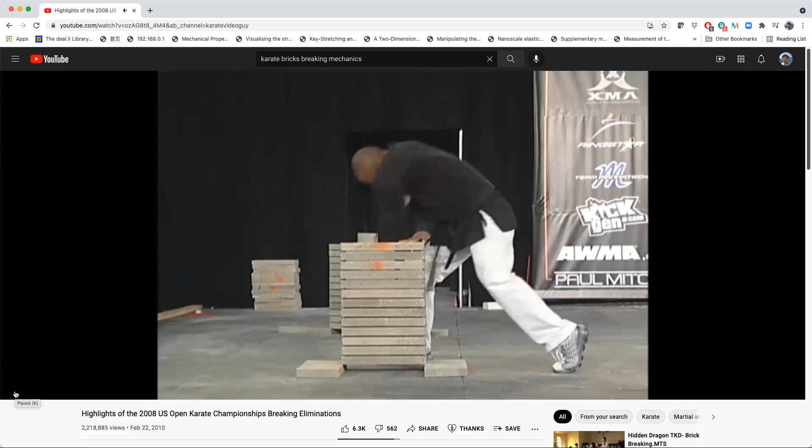All right, enough breaking for us. Let me just try to close it out. I need to find my cursor again. Not so smart on this computer thing here. All right, where's my cursor?

Okay, all right, so what have we learned from this? Well, we're not so smart. We like breaking bricks to show we have power.

Is that the only thing you've seen? Oh come on, don't be cynical, right? There's got to be something nice there, right?

So there are two motions, right, to break the bricks. One is the guy is using the forearm, right? It's pretty lean bone on it, meaning it's not a flat bone, not something flat like a palm or something like that, right? And the second is that he's hitting it pretty fast, isn't it? Very fast impact. But one thing you haven't noticed is that all those bricks he broke are supported, isn't it?

Simply supported, isn't it? Matter of fact, being like supported. All right, so what kind of stresses happen when it hits the brick? Naturally the bending stresses, but that's not it. The idea of the breaking is actually coming from the shear motion.

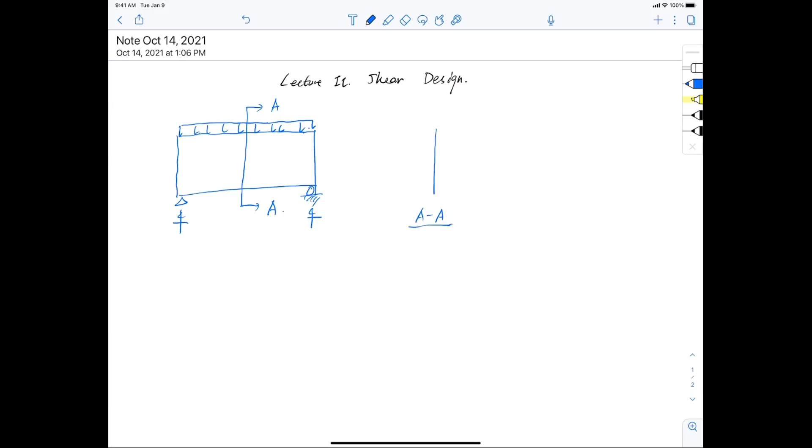So in the positive beam, I look at my section and I start to draw my stress distribution, assuming an elastic material, meaning no cracking in the concrete and nothing, right? My strain will follow a linear distribution like so. And we know that the top is in compression, the bottom will be in tension, right? So compression and tension.

All right, so this is from mechanics of materials. If I take a look at the section AA again for shear stress, all right, what is the shear stress equation here? Tau, shear stress distributed in the middle section, equal to what? And if I say I have a shear force exerted on this section to be V, it should be VQ over IB. All right, VQ over IB.

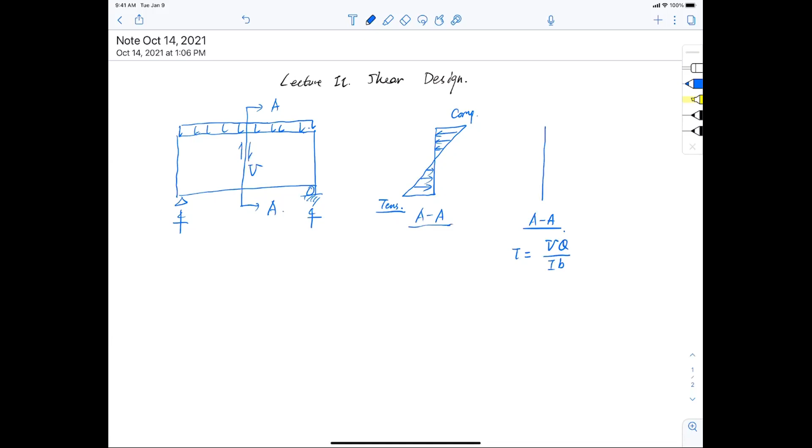Okay, and now if I do this, right, so I have a distributed shear stress like this. Okay, distributed shear stress like this. And the maximum shear stress is going to be in the middle span right here. And that's the maximum shear stress. So in terms of bending, the maximum stress should be either on top in compression or on the bottom in tension. All right, that's how the stress distribution looks like.

So here now, if you want to take a look at the stress, combine them together, I need to have normal stress, and that is bending moment M multiplied by distance from anywhere to the neutral axis, so this is Y, divided by I, the moment of inertia. And I have shear stress. Then I will have a combination of stress states in this beam here.

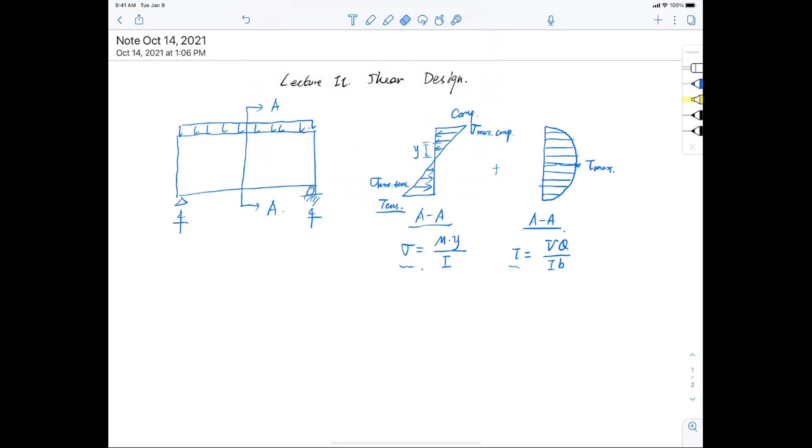So if I play along and start to look at elements along this line here, let me clear this out here. And I started seeing that maybe at the bottom I have one element, and I call it element 3. And in the middle I have another element called element 2. All right. And then on top, I have another element called element 1. All three elements are having different stress states.

All right. Now, what we have learned so far is that, assuming we don't care about shear, we have been focusing on the tensile or compressive stress in the section in terms of flexure bending, right? So if we only focus on this, right, when we bend it, the failure starts from which element? 3, 2, 1. Which one?

3, right? And why is that? Because it has the tensile stress, and concrete is bad for what? It's good for compression, bad for what? Tension, right? So without any reinforcement, concrete will bust first at the bottom. So element 3 will be gone, is that right? However, in the video, you have seen not necessarily element 3 will fail first. Is that right? All of a sudden, out of nowhere, the beam just gone and separated in two pieces. Is that right? And sometimes it actually failed in the middle.

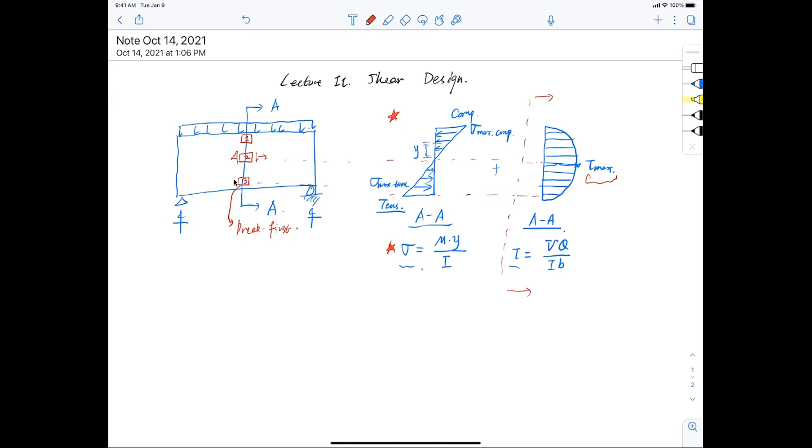Okay. And that is because we never consider the effect of shear stresses so far. So now we have to account for it. You have learned from mechanics of materials, right? In mechanics of materials, we say that if I take this element out, right? My cursor, I really don't like this. Anyway, so I look at an element, let me use a different color here, element 3, for example, right? Okay, and now I magnify my element 3, and I know that it is under tensile stress, isn't it? So I know that here I have sigma max tension.

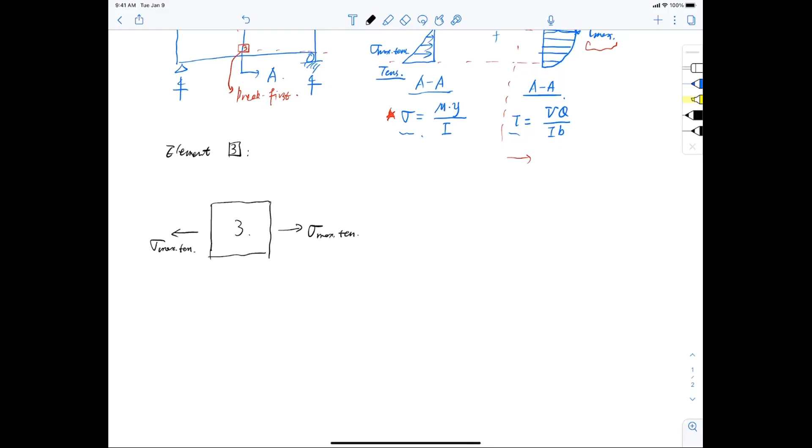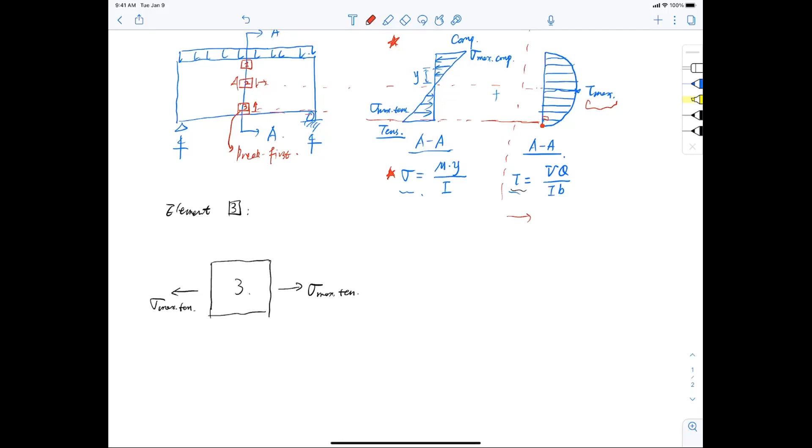Okay. Do I have any shear stress at element 3? Well, let's take a look, right? Element 3 is at the bottom of the element, so I trace it all the way back to the shear diagram, and notice that there's no shear stress in element 3. Very small amount, right? It's on the edge of the diagram and it's almost 0. As I move up a little bit, I will see a very tiny amount of shear stress. All right, so let's draw it. So I say that I have some shear maybe, but a very small amount, so I can ignore it. So that means when I have this element failed, I need to examine the principal stresses.

Do we understand the principal stress definition? Anything? Forgot? Galaxy far, far away, long, long ago. What is principal stress? Anyone?

Principal stresses are the stresses that are only in what? Tension and compression, right? After you rotate the coordinates to a principal plane, you only have the tensile and compressive stresses, right? So in this case, since I don't have any shear stress, I only have the tensile stress. And that naturally is my sigma 1, which is the highest of the principal stresses. And meaning that my failure is going to be a straight crack like that, isn't it? Okay, that's what it is for element 3.

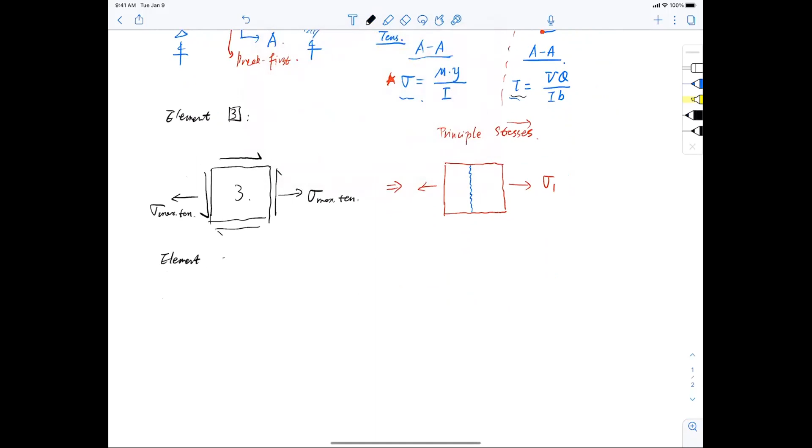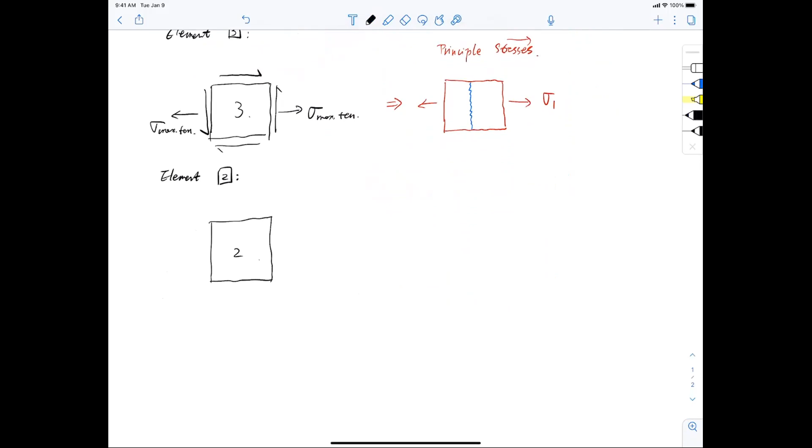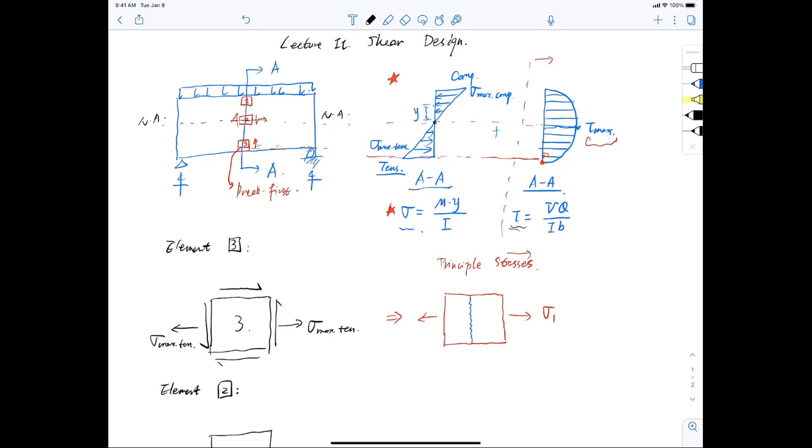But element 2 is different. So when I have element 2, I take a look at the element, and there's no tensile stress or compressive stress. Why is that? Because element 2 is sitting right on the neutral axis. And on the neutral axis, there's no strain. It's the pivoting point, no strain, okay? So that means I only have the maximum shear stress. So for element 2, I only have a shear stress tau max, and I don't have any normal stresses.

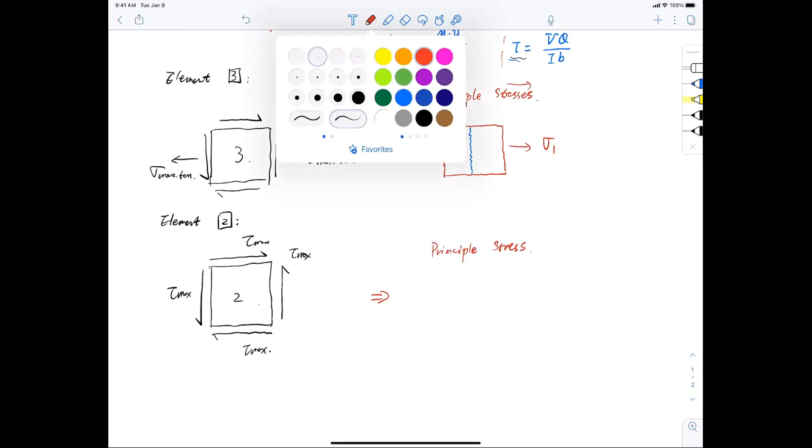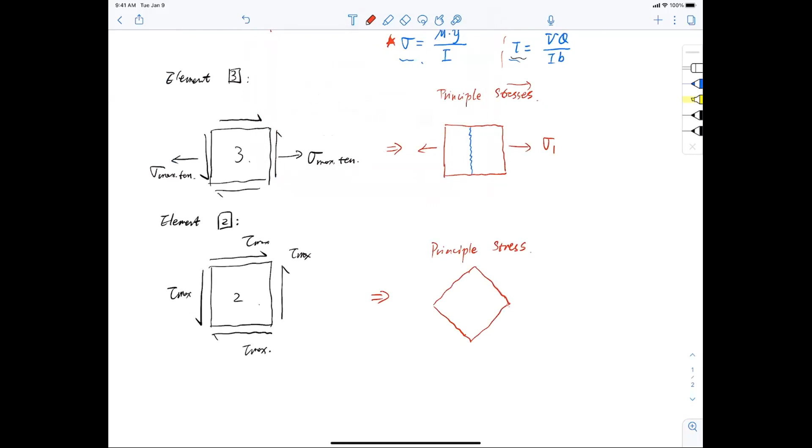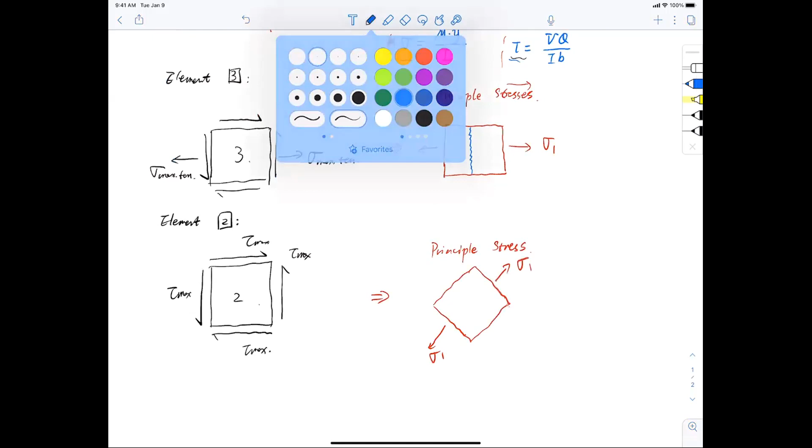Okay, so for a pure shear stress state, when I convert that into principal stresses, meaning tension and compression only, we know that I need to rotate that by a 45-degree angle. And then my principal stress will be in this direction. And then I will be left with a failure direction like this. I break it like that, it will just fail in the middle, right?

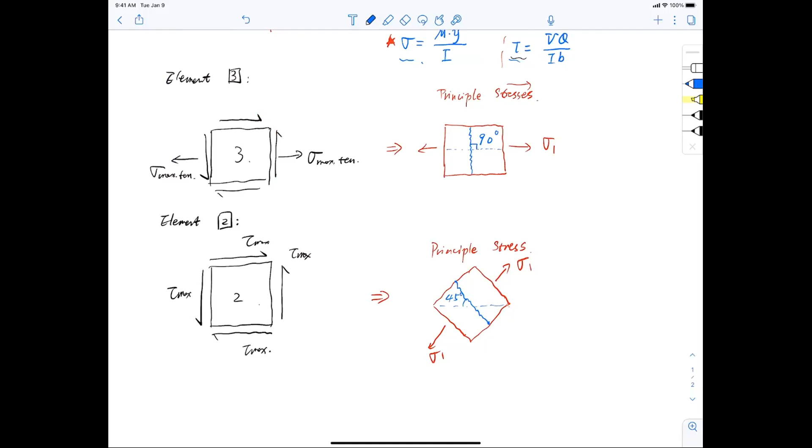Now pay attention, folks. For element 3, when I have the failure plane, the angle with the direction of principal stress is what? 90 degrees, isn't it? But when you rotate to a pure shear stress state, this angle here is what? 45 degrees. Okay, so that's the orientation of the crack.

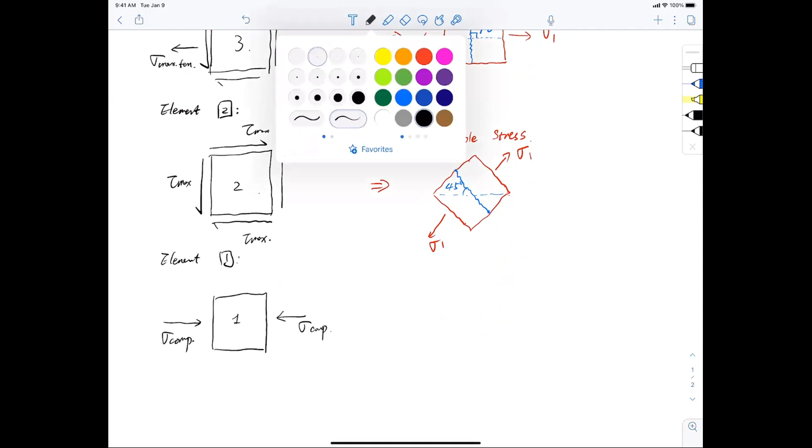All right, now if I move on to element 1, and let me speed up a little bit for you, element 1 is just like element 3, but instead I don't have any tensile stress because element 1 is on the top, so I only have the compressive stress. So when I draw my failure diagram for element 1, I have this nice block here, but I have only the compressive stress. And when I have compressive stress, the failure is again at 45 degrees, but this goes the other way.

Okay. You say, Bob, you have lost me. What are you trying to do here? You pick 3 elements from a beam, you did this principal stress, which I forgot long ago, and you draw me these cracks. What do you want? What I'm trying to do is, if I know all these so-called micro crack orientations under the stress condition, I can actually draw the crack patterns on the beam, can I?

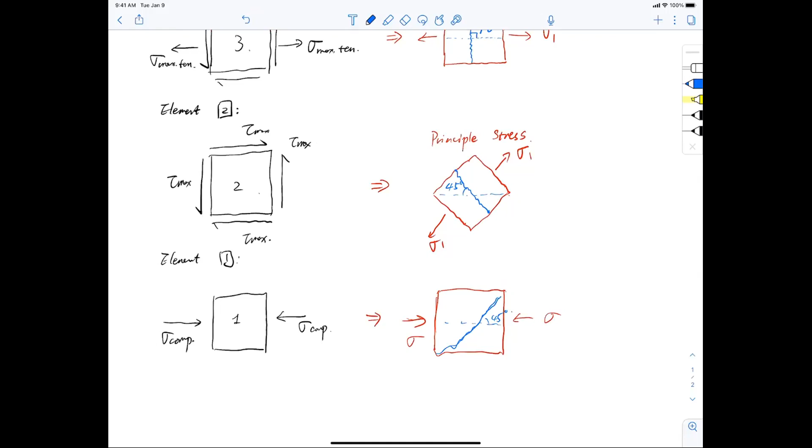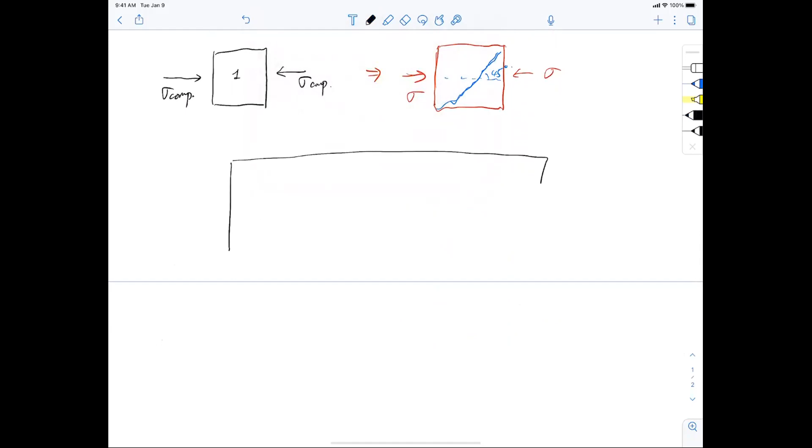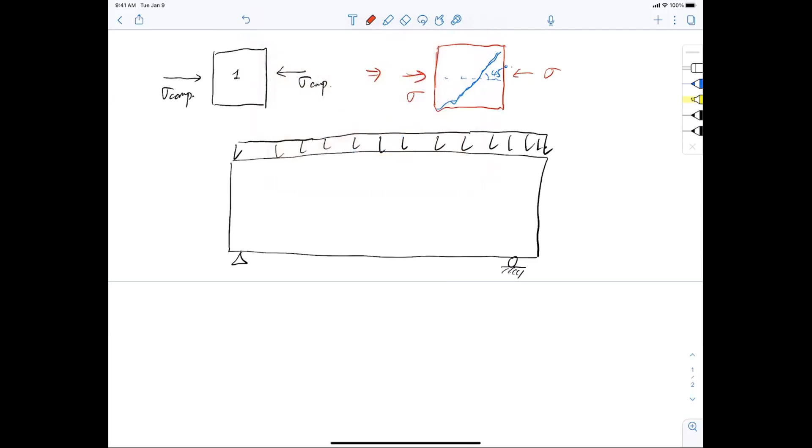So if I have a beam, simply supported, let me zoom in and show you the beam. You can go to the civil structure lab, they have beams tested sometimes, with a uniformly distributed load here, right? And I can start to draw the crack orientations. How do the cracks look? One type of crack will be something like this. And right in the middle, at the center span, I have a crack like this. And that is a so-called flexure crack.

Okay, and as I'm getting away from the middle, I start seeing some cracks like this, and like this, okay, and then like this, and I start to see that the more I get away from the middle span, the more likely I see a 45-degree angle. Now I'm talking about these diagonal cracks right here, diagonal cracks right here, diagonal, like that.

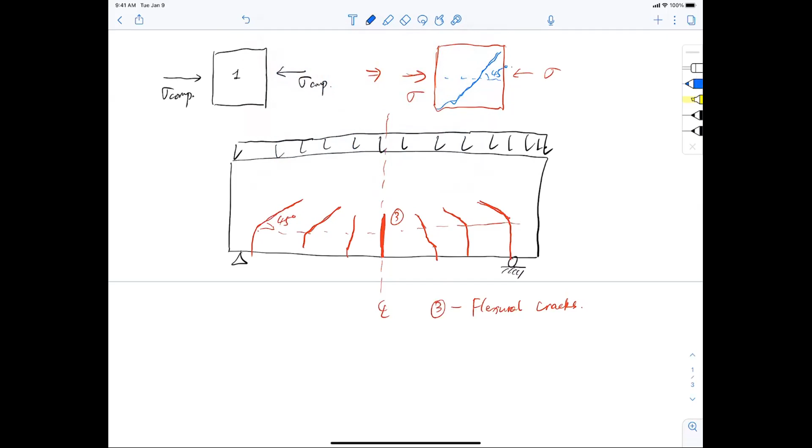All right, and now I start to chain them together. I say, look, if I do a line perpendicular to all my crack patterns, I start to see a trend. What kind of trend am I seeing, right? I start to see that all these lines indicate that I have something like this.

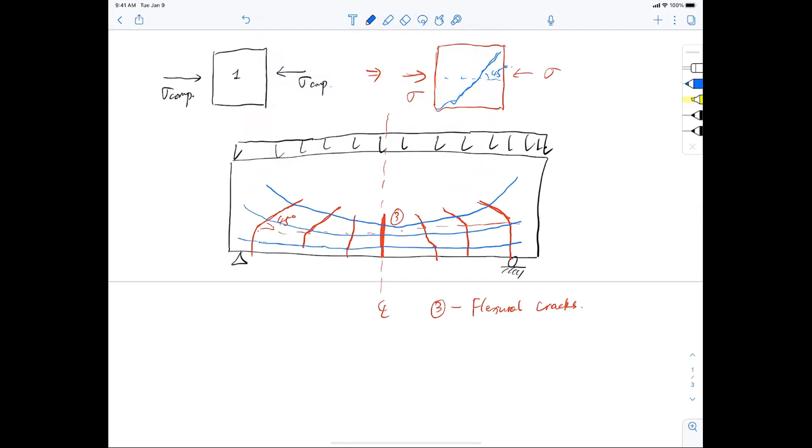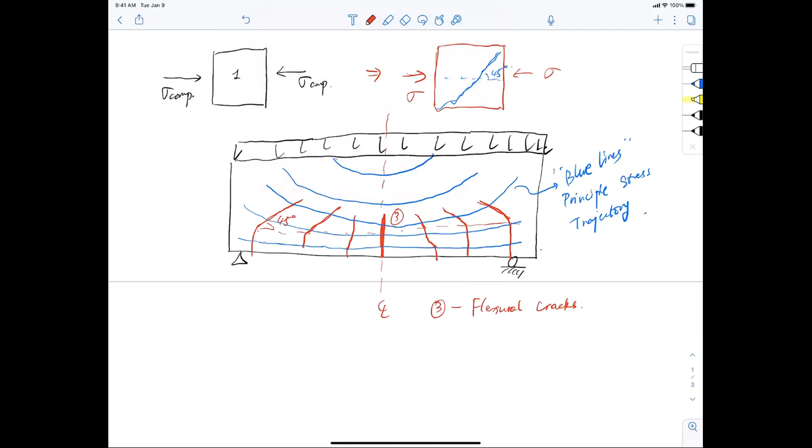Okay, and these blue lines are called the principal stress trajectory. The blue lines indicate the principal stress trajectory, meaning that's where the tensile stresses are in this beam, and that's how the crack is formed. And we call this, in the middle one, 3 is the flexure crack. And as I'm getting away from it, 2 is the so-called shear cracks or diagonal cracks.

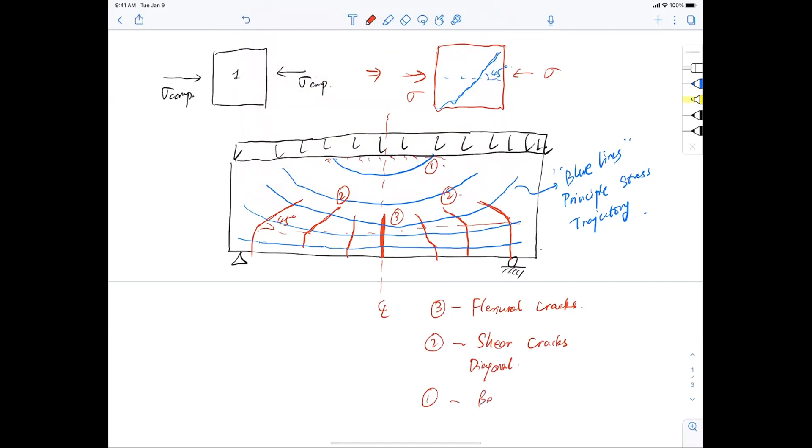All right, and now if you notice here in the top, sometimes you see some micro cracks, right? And these are the crushing cracks due to local load, bearing cracks, minor cracks. So all we're caring about is this shear crack, diagonal crack. That's what we worry about.

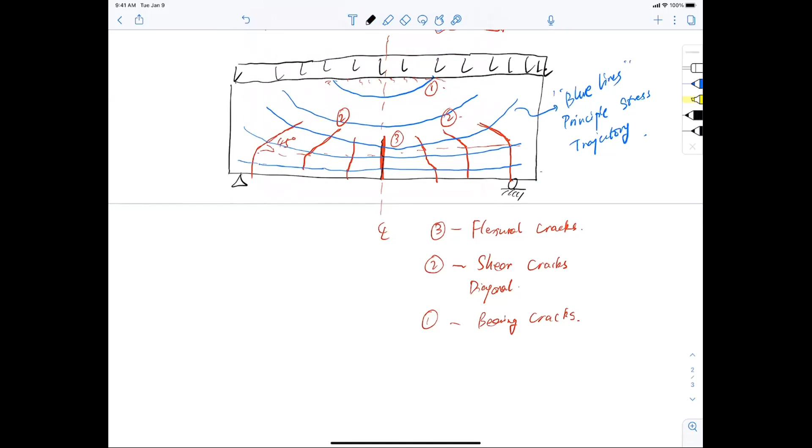So we spent about 10 lectures before today talking about the flexure cracks, how we reinforce that, right? So help me out here. If I put a reinforcement to prevent the number 3 flexure crack, what is the direction of my reinforcement? Is it flat or is it vertical? How do we lay our bars? We lay them flat, right? Just like this. That's how I'm going to stitch my flexure cracks.

So my question to you is, if I want to reinforce my beam against the shear crack, how am I going to put the stirrups or reinforcement in this case? Flat or vertical? Can I put it like this? Can I put it like that? Oh, yes, I can, but that's not efficient. The best way to put it is something like this, right? If I can provide my bars perpendicular to the cracks. So it'd be something like this, isn't it?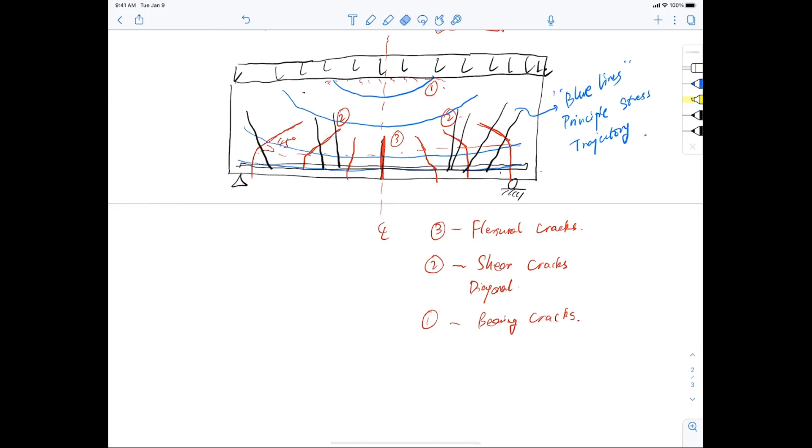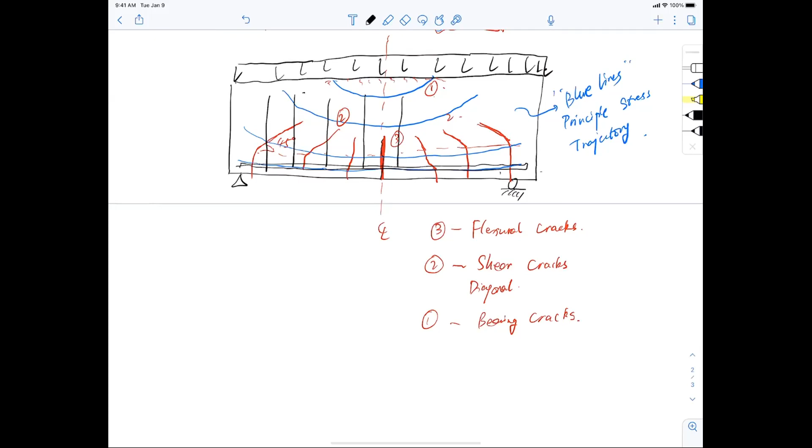All right, that's how I'm gonna put my bars, but that is hard to fabricate, isn't it? I can never have inclined stirrups to fabricate on site. We can, but that's hard to fabricate. So to avoid that, we have so-called stirrups to help bridge the cracks. And to make sure they're vertical, I tie another top bar to form the so-called reinforcement cages.

Now, we know this, but the quick question is this. If I have my main flexure cracks in the middle, as I'm getting away from them I get this diagonal crack, and I'm putting stirrups here. Do I really need this vertical reinforcement in the middle span or not? Do I need them? I probably don't, isn't it? Why? Because there is no diagonal crack. The whole purpose of putting vertical reinforcement is to prevent those diagonal cracks, right? So that means if there's no shear, there are no stirrups.

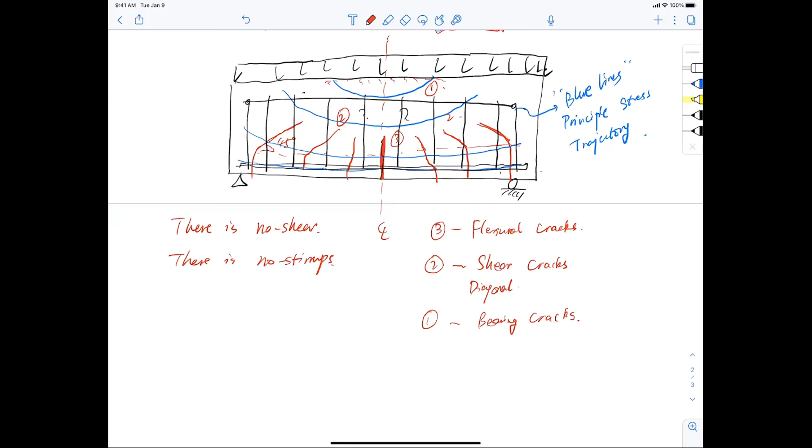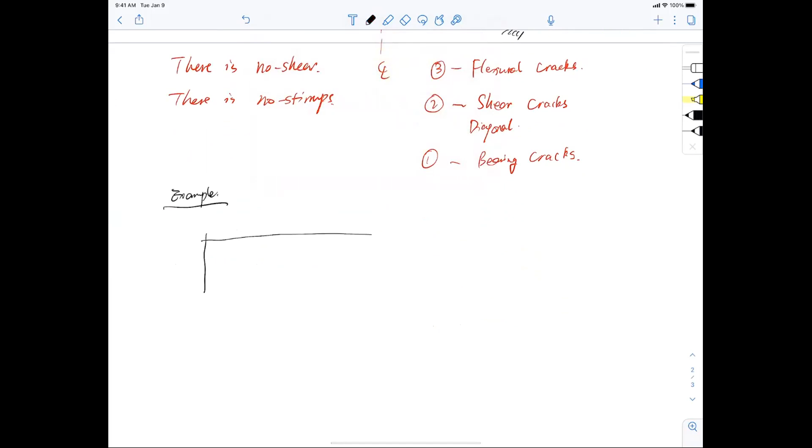Okay, why is this so important? Because say I have a beam, and my beam is sustaining, just to give you an example, a concentrated load, okay? And I have supports at the 2 ends, and at every 1/3 I have forces here, forces here.

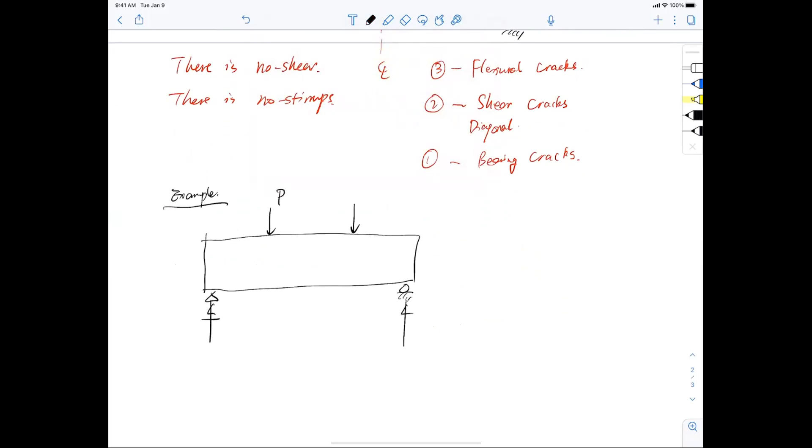So look at the shear diagram. Let's draw the shear diagram together, okay? So this is P. So here I have a shear force of P, isn't it? And I have a constant shear force until I hit this point here. And when I hit this point, I become what? 0 shear force, isn't it? Shear diagram 0, right? Then I go on and start seeing this shear, and it goes here, and that's my shear diagram.

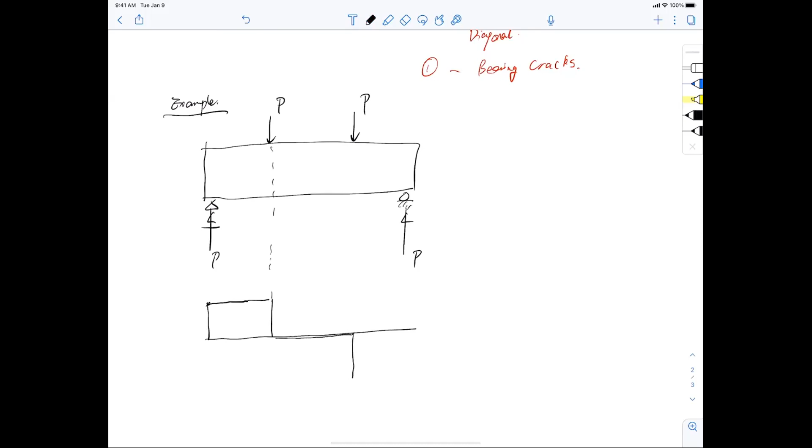Okay, and assuming this is negative, positive, this is negative, and now will be my shear diagram. So my question is, if I want to put my vertical stirrups, where am I going to put my stirrups, vertical reinforcement, in? On the sides or in the middle? On the sides or in the middle? It's not a trick question, folks.

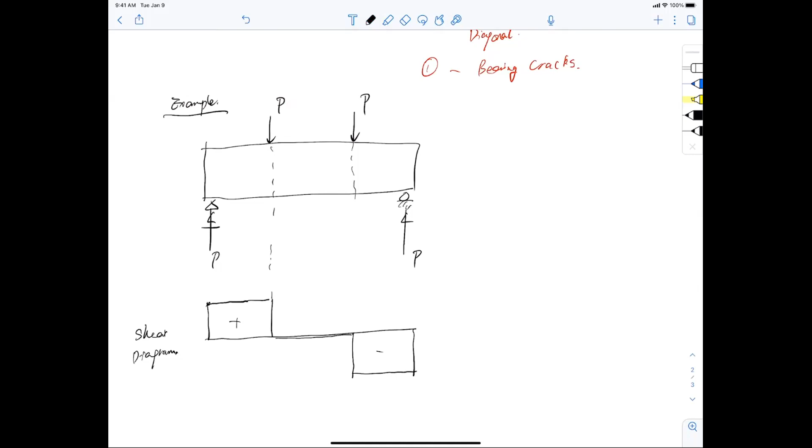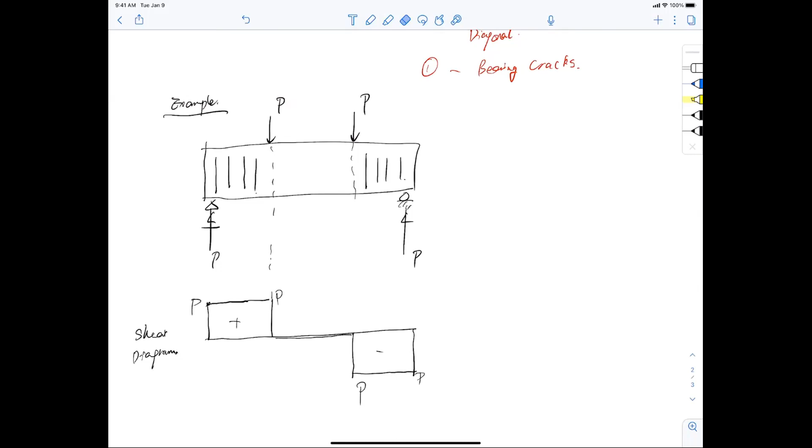Where am I going to put my shear? If I only have shear force on 2 ends, where am I going to put the shear? Sides or in the middle? Sides, right? So that will be how dense I put my shear reinforcement here. No shear reinforcement in the web, in the middle.

All right. But now, if I take a look at the moment diagram here, at two ends, and now at this end, I have so-called what? Moment, right? And the moment goes like what? At the beginning, here, do I have any moment? I don't, right? So here it's 0 moment.

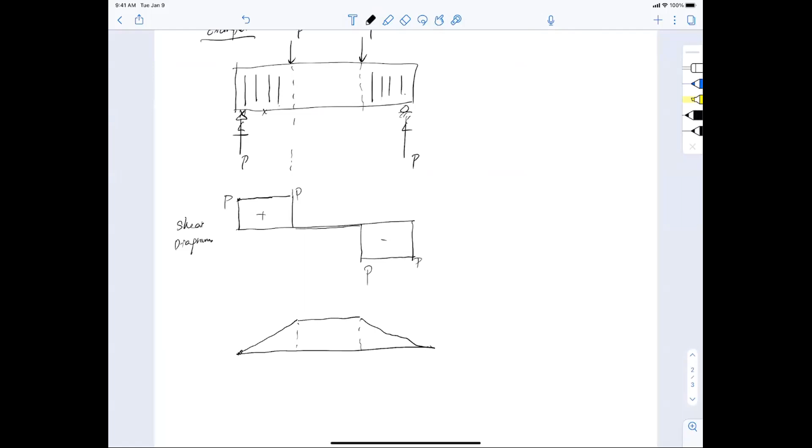And I got to some moment, and increase, increase, increase. And then I have a constant moment zone, isn't it? Constant moment zone. And those are the highest moment. And then I go down like that. So if this is the moment diagram, I put my longitudinal bars in as well. So then you put bars like this. And because here I have a lot of moments, I will put a lot more reinforcement in the middle rather than the two ends.

Okay, so this is to show you that in a general setting, the location of shear reinforcement and location of flexure reinforcement are not the same. To simplify the design, though, we can make them consistent across the span, but in practical condition, they're not necessarily the same. All right, so we have to study for the shear reinforcement, which means these are the stirrups that we have to study for. So that is as much as the theoretical side of the shear.

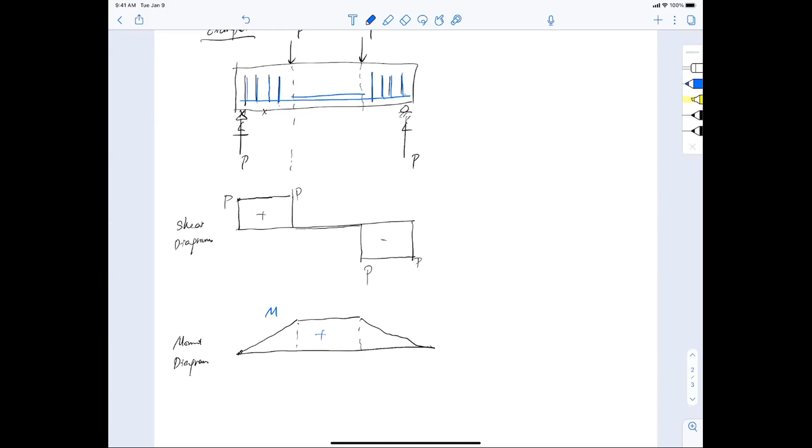So let's talk about, where is my document here? How are we going to design for it? Let me see if I can open up my notes. Give me 1 second, folks. Stop sharing. This is my shear figure notes. Okay, here it is. Go back here, share my screen. Is it seeing anything? No? Okay, here we go.

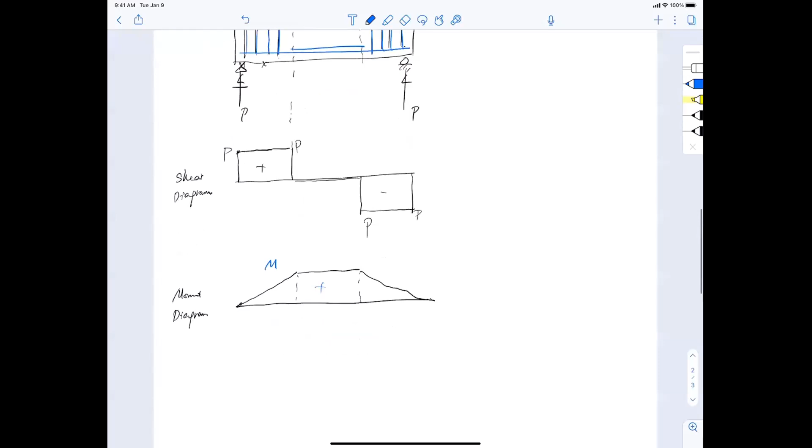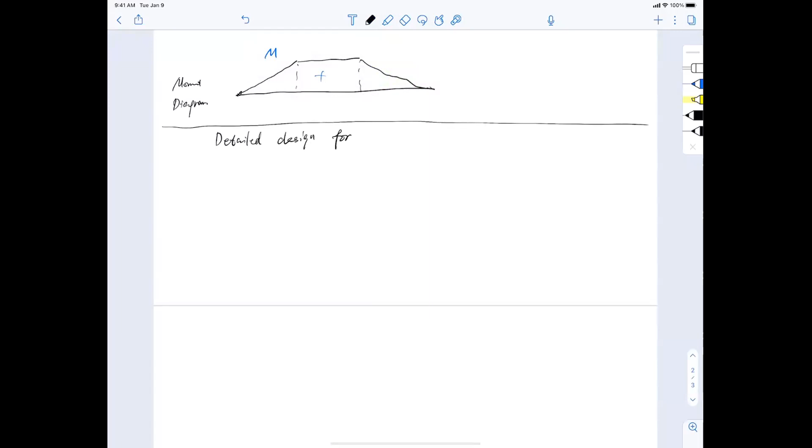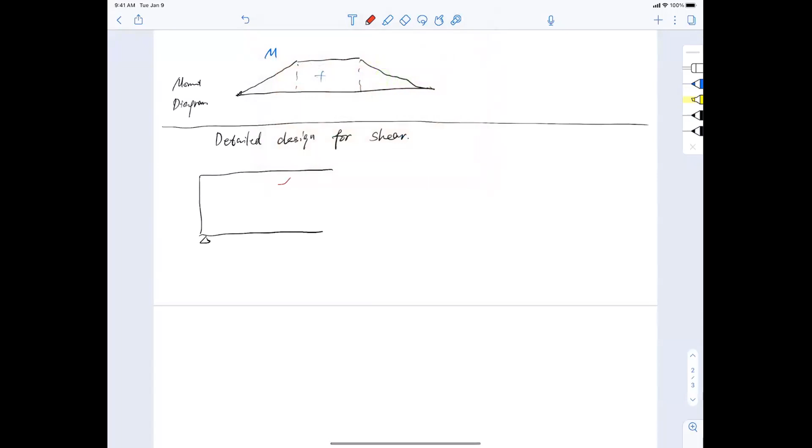So we now know that we need to design shear differently. So I want to take a deeper look at this failure: detailed design for shear. We know most likely I'm going to have cracks at the end of the support like this. And my stirrups most likely are going to run across the crack like that, not a wiggle line, but vertical stirrups. And I have longitudinal reinforcement going through here.

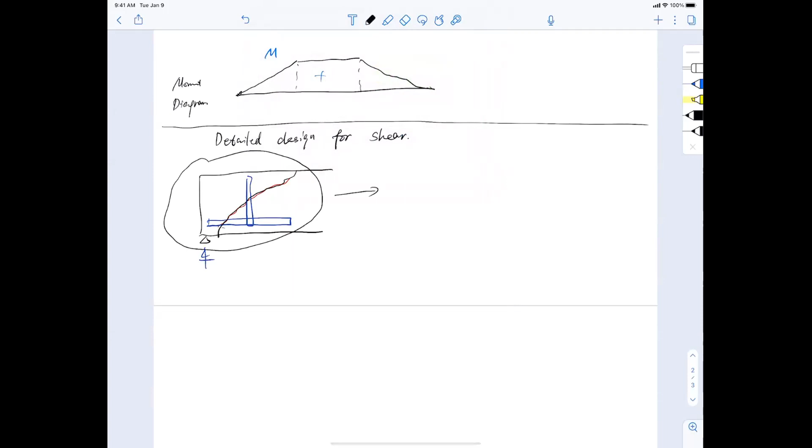So I'm going to take a quick look at the cross-section cut. If this is a crack, I'm going to take this part out and zoom in. So I have the left end supported like this, and I have the top beam, arced a little bit, and that is my crack surface. Now, if I do a free body diagram, I want to find out the reaction forces. There's supposed to be a compressive force here, C1 on the top, and there's got to be some shear force here, VCY.

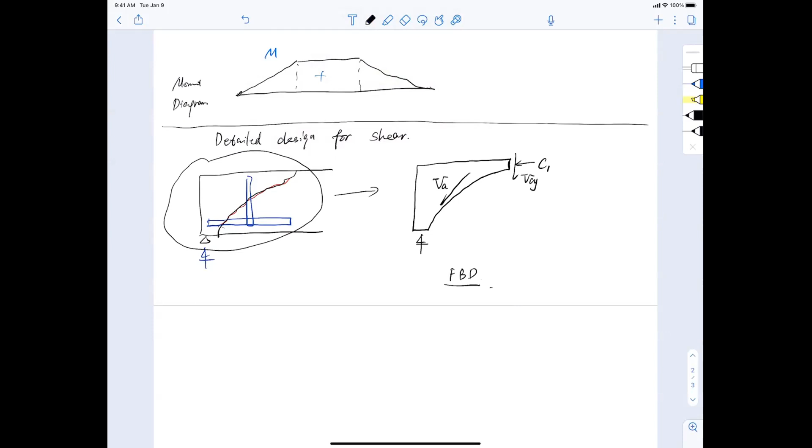And on this diagonal crack direction, I will now have a shear force here, VA. And then I have another piece, the counterpart on the right-hand side, and I see that this has an equal and opposite VA to balance the other side. Now, don't forget, I have bars here. For a moment, don't worry about the vertical stirrups yet. Just say that I already have flexure reinforcement, and I cut the bars in the middle.

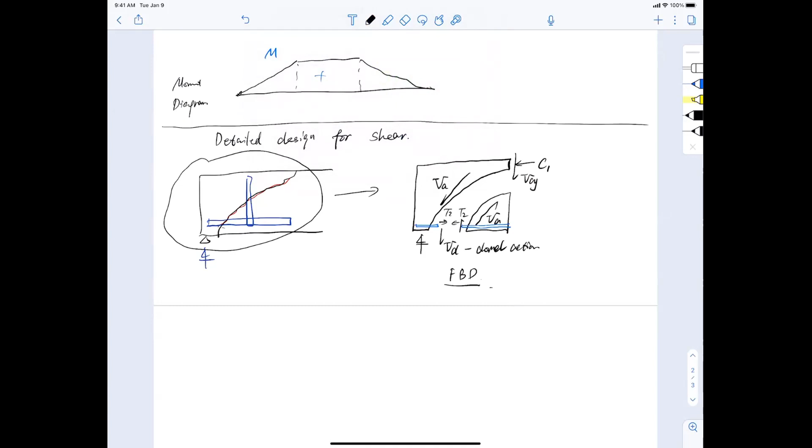So here at the cut, I have the tension force T2 from the bar, and I also have a dowel action from the bars, VD. So that's all I have on this enlarged section of a diagonal crack. Now, this is a local compression from the top part, and this is a shear force. So VCY is the first shear force I see, the shear force on the uncracked concrete.

Okay, but I look at VA, we're at this diagonal crack here. Let me zoom in a little bit more, right? If I zoom in here, what I really see in the concrete surface... How many of you guys have seen a concrete crack before? A few of you guys, right?

Have you finished a concrete surface before? Quick question, is it smooth or rough? Rough, right? Would you put your face on it? Probably not, right? Why is it rough? Because there's cement and also what? Aggregates, right? So here on this interface, instead of a smooth surface, I will have these rocks.

Isn't it? So these rocks are rubbing against each other to provide that shear resistance. So we call this portion the shear resistance from the aggregate interlocking. Okay, and please remember this because this will be in exam number 2, right? Aggregate interlocking.

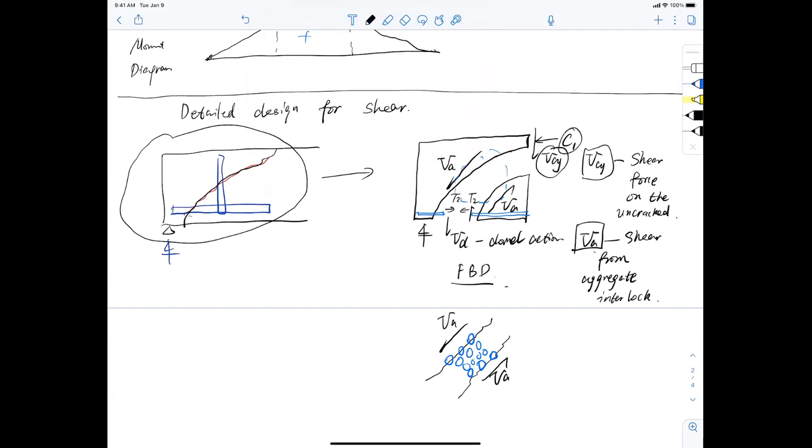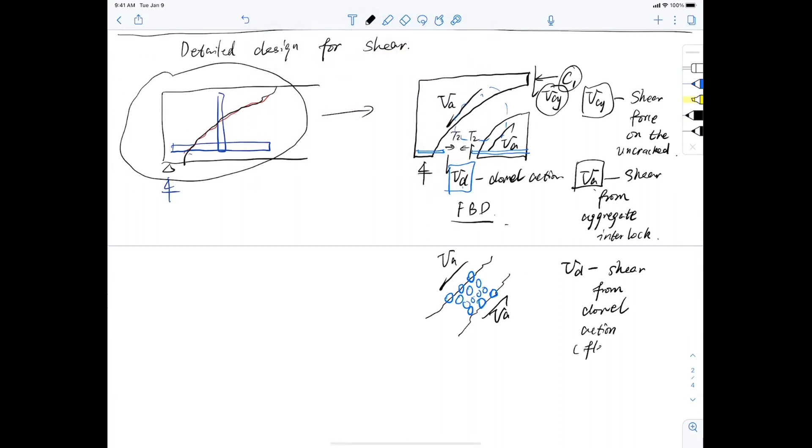And don't forget, I have the reinforcement to help carry some of the shear force, VD here, okay? So we call this VD the shear resistance from dowel action. And this is a contribution from the flexure reinforcement.

Okay. Now, with this in mind, the total shear resistance should equal VA, aggregate interlocking, VCY, the shear force in the uncracked region, and VD, which is the shear resistance from the dowel action. So that is the shear force resisted from concrete only.

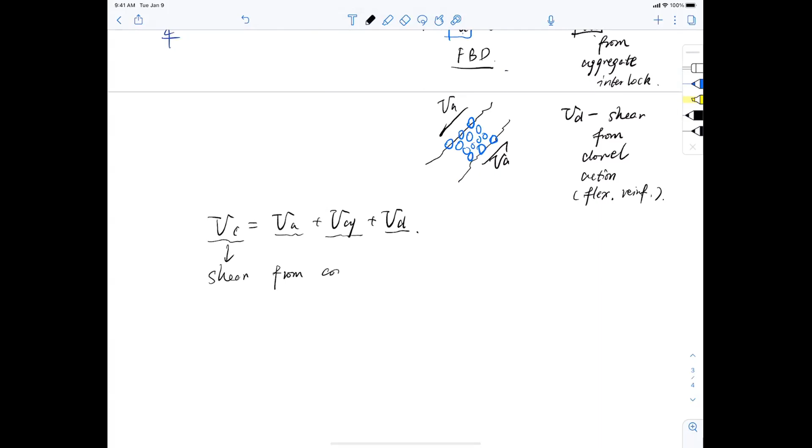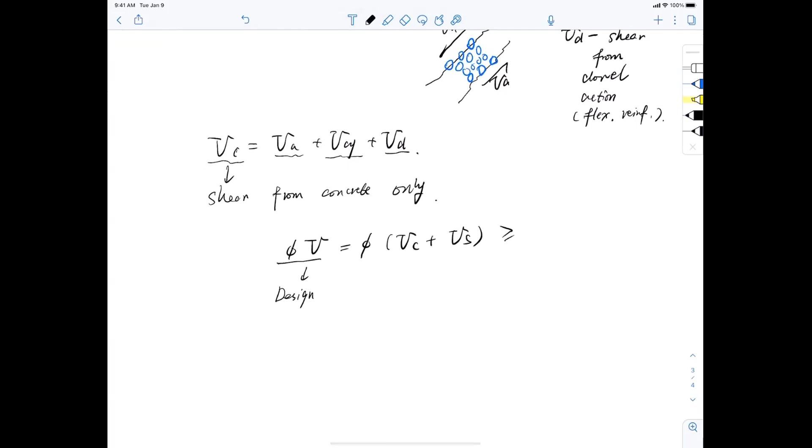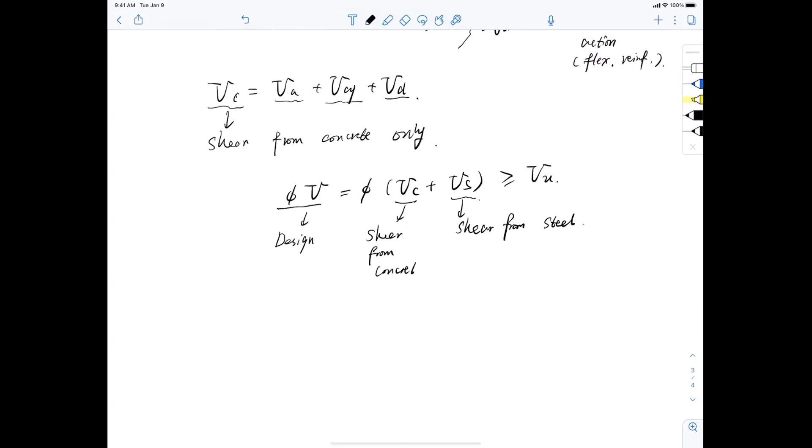Okay, so the idea is to have phi V equal to phi VC plus VS, this is design shear, right? As we talked about before, greater than or equal to VU. And VS is the stirrups provided resistance. So this is shear from steel, and this is shear from concrete. And today what we have talked about is only about the concrete.

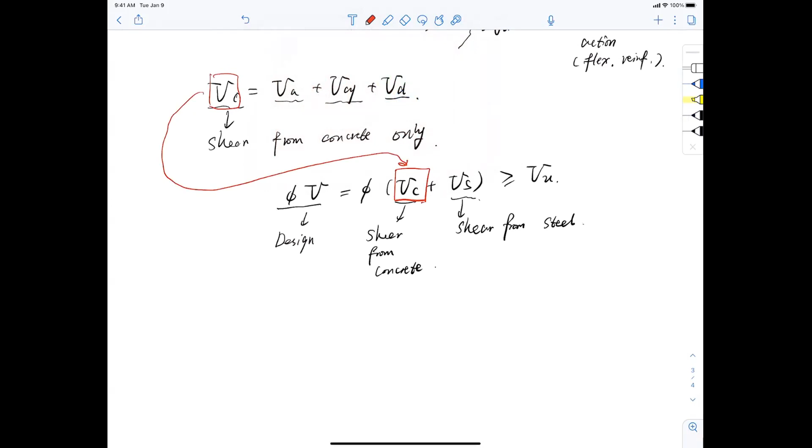It's only about concrete. So how the two work together, I want to draw you the reinforcement cage. In the 3D view, this is how the reinforcement cage looks. I will have stirrups like this, like that, like this, like that. And I have longitudinal reinforcement this way, here, here, and that is my cage.

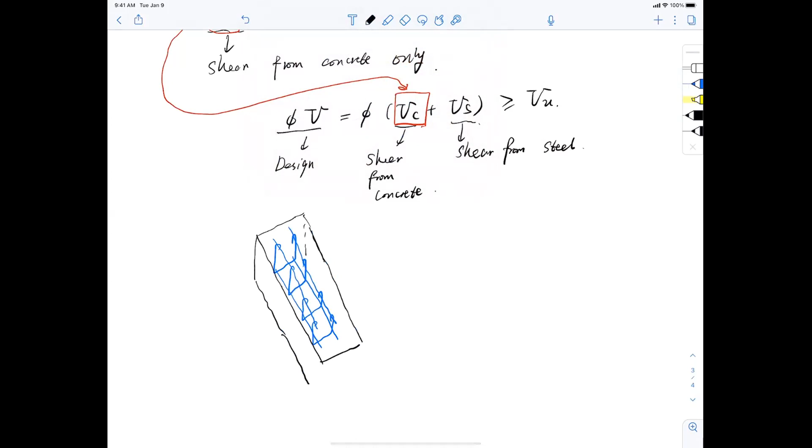And this whole cage will sit inside a concrete section just like this, inside of this box here. Okay. And the diagonal crack will initiate somewhere here and go all the way here. So you see a cut like that.

Okay. And if I look from the side view, the side view looks like this. And now if I do the free body diagram, let me cut this and expose the VS like so. Okay, and that's the top bar, right? And this is another stirrup, then a stirrup, and this is the bottom bar like this, right?

Okay, so this is VD, resistance from the dowel action, and this is VA, shear from the aggregates, and this is VCY. Okay, so now the total shear force, like we label here, V should equal VCY plus VD plus VA plus VS. And folks, this one here is the concrete contribution VC.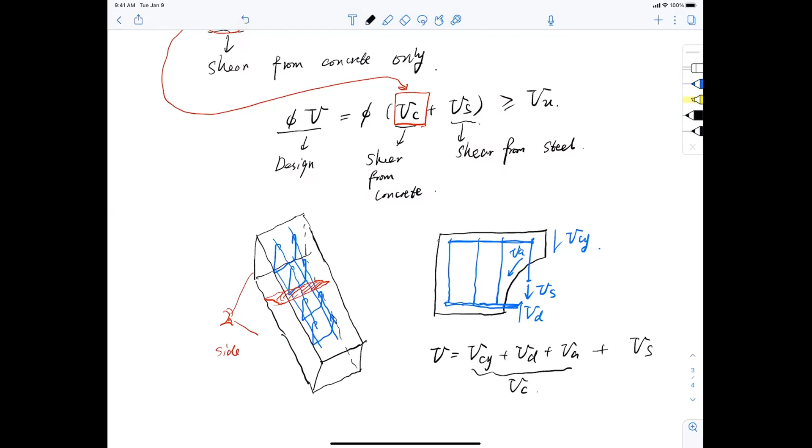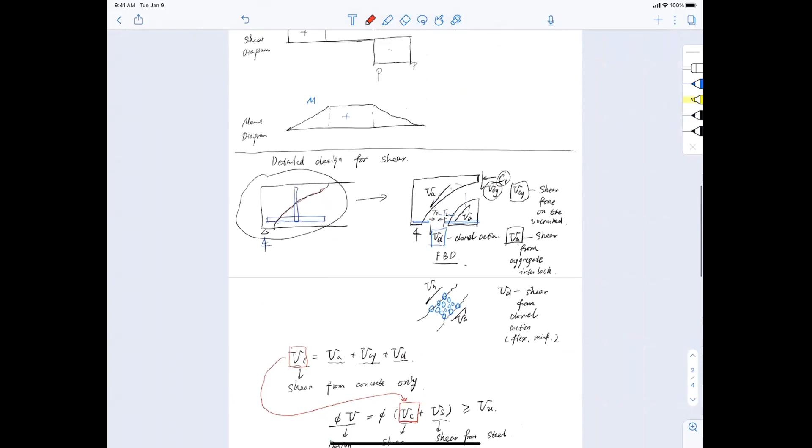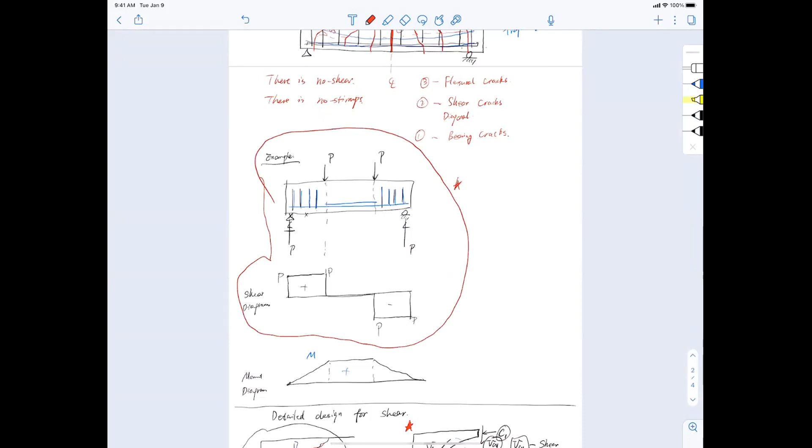Okay. All right, guys, today's gonna be a short lecture. I'm gonna save most of the mathematical equations for Monday, okay? But I want you to remember these drawings, all right? Remember this drawing, and I'll test you in the exam. And we will see these three problems in exam number 2 for the shear introduction part.

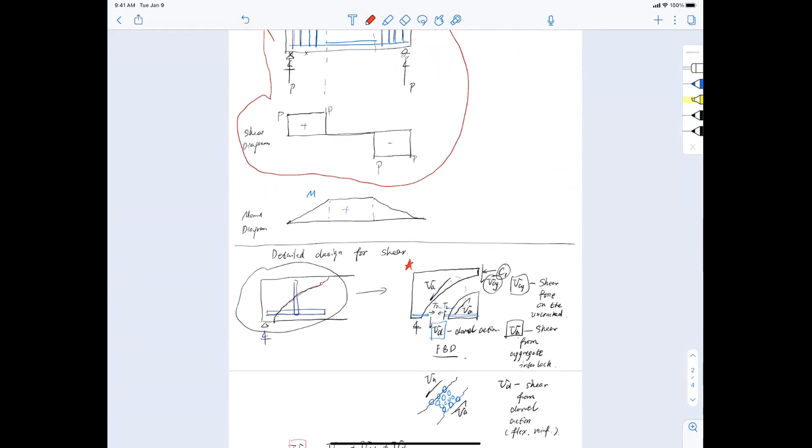Yes. Down there at the end, you said VCY, VD, and VA. That is what makes up VC. Yes. So VC basically equals those three, right? And there will be three problems. One, multiple choice. I show you the pattern of the shear stirrups. You need to know why this is the pattern and select the correct pattern.

The other multiple choice, I ask you, what are the different shear components coming from the concrete side? And then last, there's a mathematical calculation we'll talk about on Monday: when do I need stirrups and when do I not need stirrups?